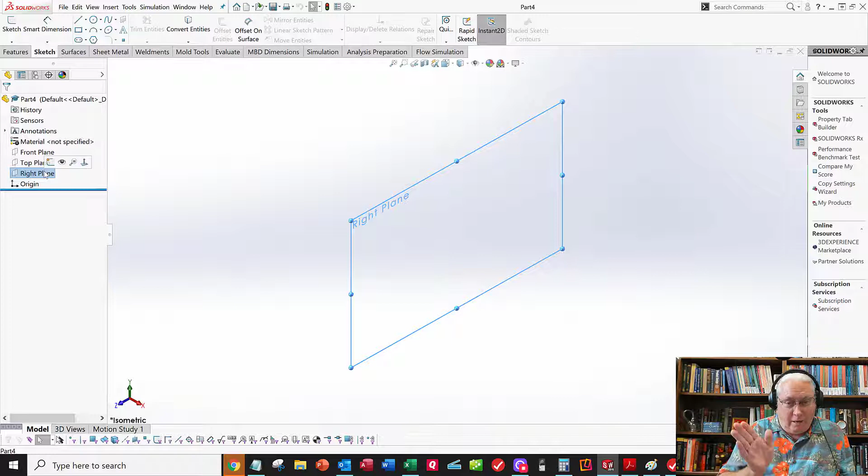We need to find an appropriate plane to sketch on, and I believe it makes sense to sketch on this right plane, just like we did on the V-block, so that these parts will share that same right plane going right through the middle of the whole assembly. So we'll sketch on the right plane, sketch tab, hit the sketch button.

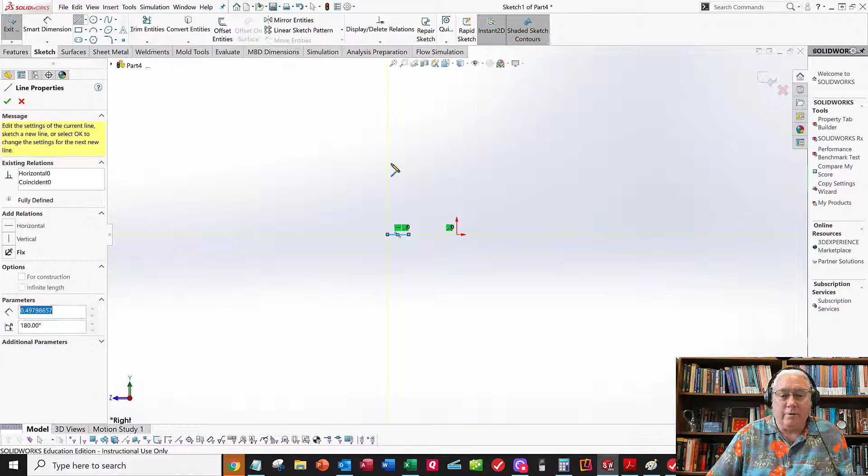Alright, let's draw this thing up here. We're going to make the bottom of our part the top plane, so I can start drawing this. I'm not going to put these fillets on here because I want to put those fillets in as features.

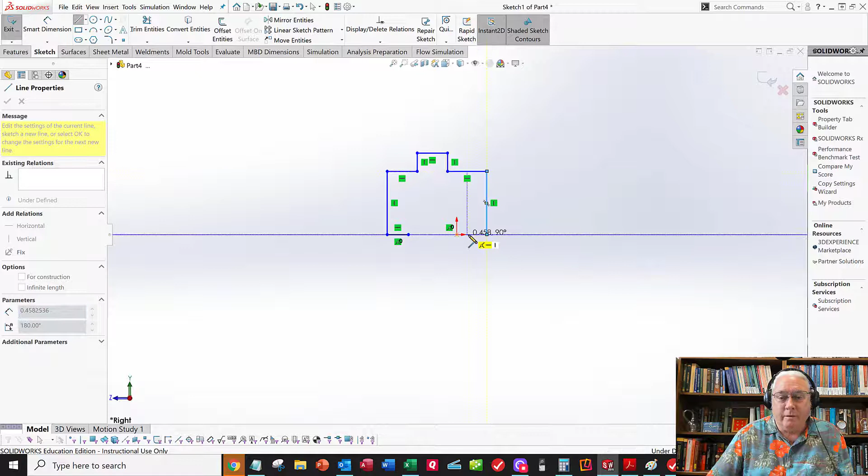So I'm going to draw this, trying to make all these lines vertical and horizontal, so I don't have to come back later and fix them. Seems to be going relatively well. And if I close it out, which I didn't, I should get my shaded shape there.

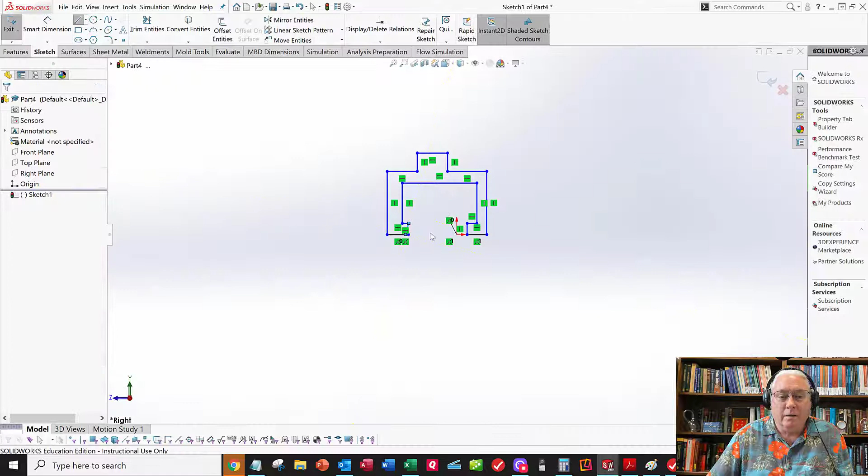So I must have mucked up that last click there, zoomed out too far. I can fix that by selecting that point, control clicking that point, and merging those together. Now it's a closed loop.

Need to make that vertical. So it's close, but no cigar. Everything else looks like it's behaving relatively well. Let's go ahead and drag this thing over so it's closer to the middle where the origin is.

Maybe I can put a midpoint on this top line here, because this is the center of my part. There's the midpoint. And control click the origin, make those line up vertically. Alright, now we're on our way.

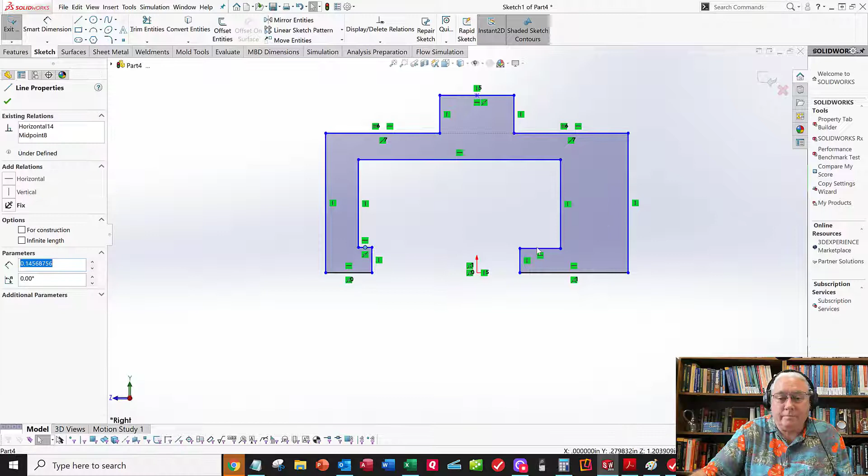So let's go ahead and do some constraints here, like we like to do. These need to be equal and collinear, so I can do those at the same time. These need to be equal. Didn't want that point right there, I wanted this line. Control click that line, make those equal.

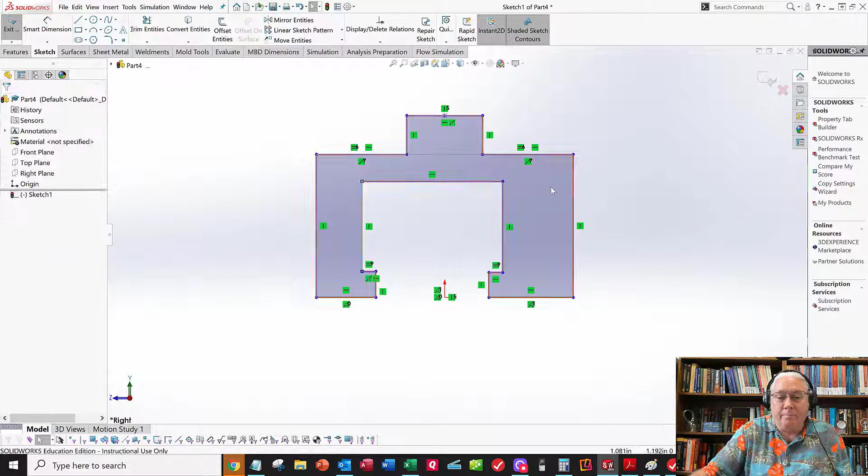Alright, that looks weird, let's drag him back. Drag him over. Alright, now maybe I need to make these equal. Do as many geometric constraints as I can. Now it looks pretty well behaved.

Alright, so I'm going to change these dimensions a little bit. I don't like these off-kilter numbers. This is supposed to be a 0.97 radius here, but I want to make it a 1-inch radius. So change that 0.97 to a 1-inch radius, and we'll put that on as a feature later.

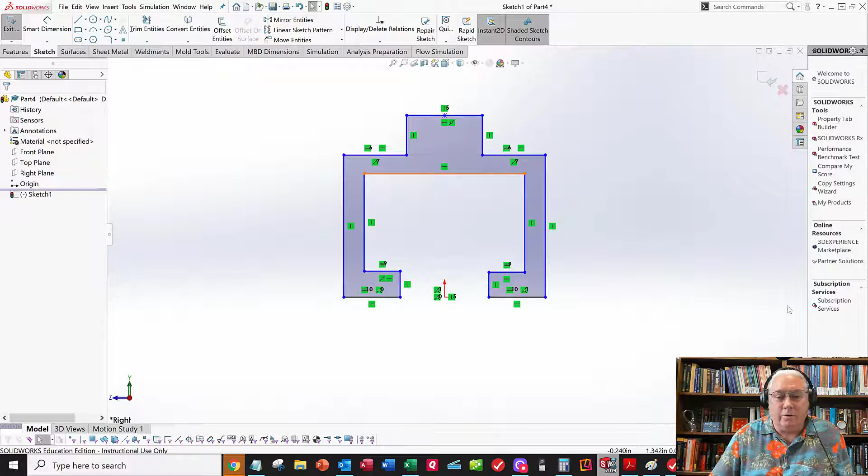What I want to do is maintain this part thickness. The structural engineer told the design team that he wants these thicknesses of this U-clamp to be 7/32 of an inch, all these thicknesses here, 7/32. So I want to put that as design intent into my part model by going Tools, Equations, and make a global variable called little t, equal to 7 divided by 32, which will help me with these dimensions.

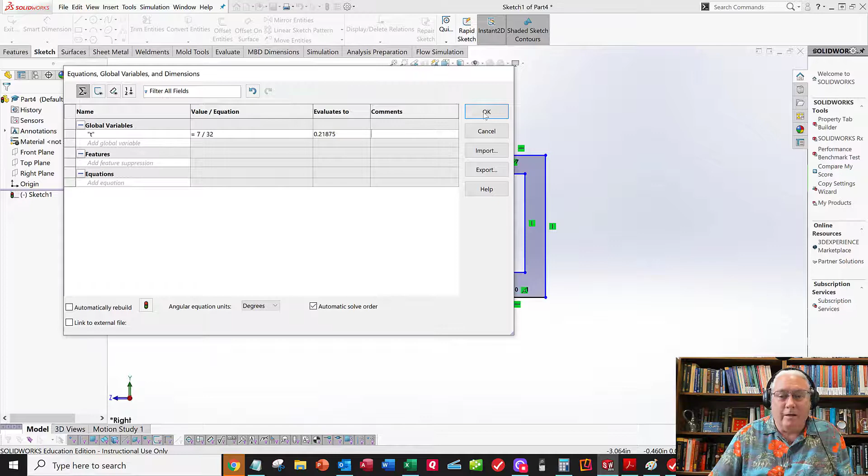So now I want to start placing those dimensions here to here. That's one of them. Here to here is another one. Here to here is another one. And here to here is the last one. Oh, doesn't need that one because of the symmetry, so that's good.

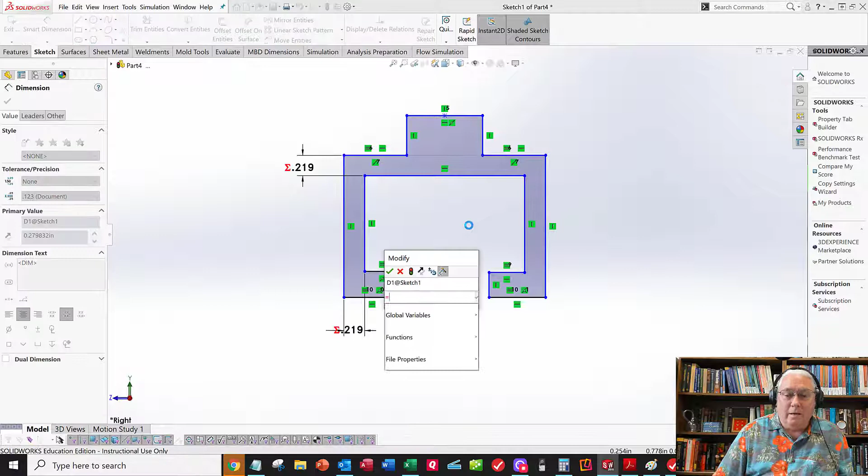So I want to double click on this guy fast and say equals global variable t. This guy here is going to be the same thing - double click fast, equal global variable t. There should be one more around here somewhere - equal global variable t. And I get all those symbols on there with the summation, the red summation, so I know I did those right.

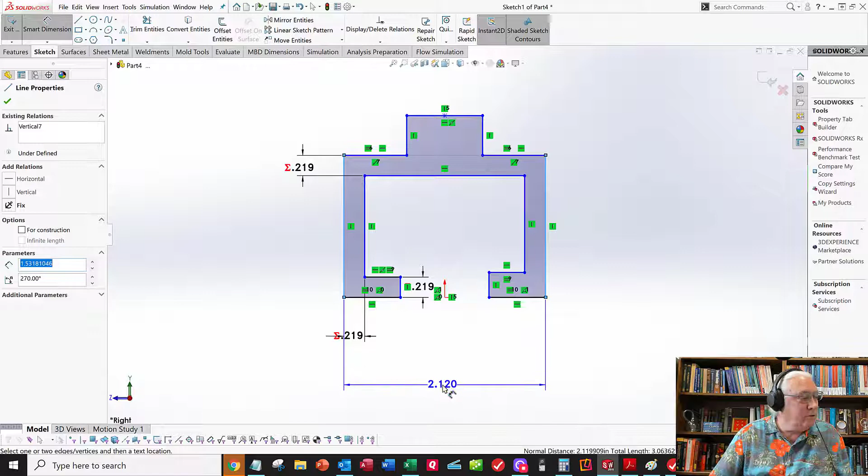Alright, so if this is 1-inch fillet, and these are 7/32 here, this is going to be 2 inches wide, and this overall width here is then going to be 2 7/16 - so 2 plus 7 divided by 16. That's my 2.44, it's really 2.4375. Now everything will line up good. That, minus another one of those over here, gives me my 2 inches, which means those two fillets are going to be correct. Now we'll keep going on my dimensions.

I want this width here to be 5/8 of an inch, and I want to type that in parametric, as design intent, it's supposed to be 5/8 - it's actually 625. Now what do I need to do? Let's see, I need to go to overall height. And the overall height, looking at this layout here, it looks like 2.75.

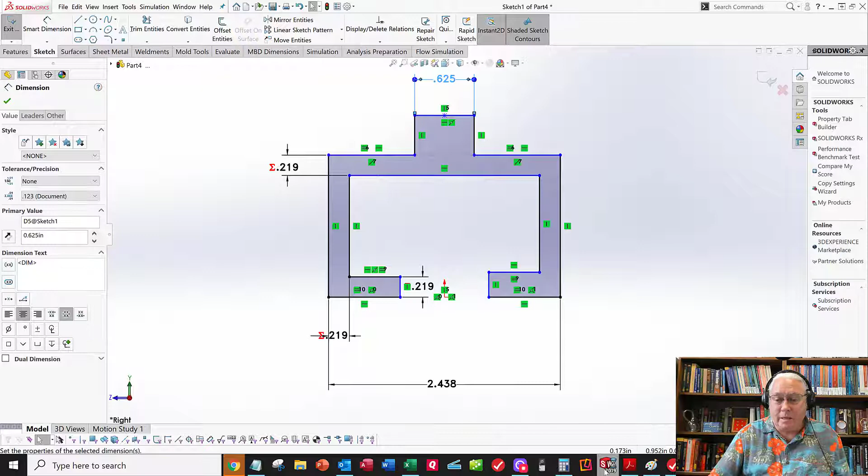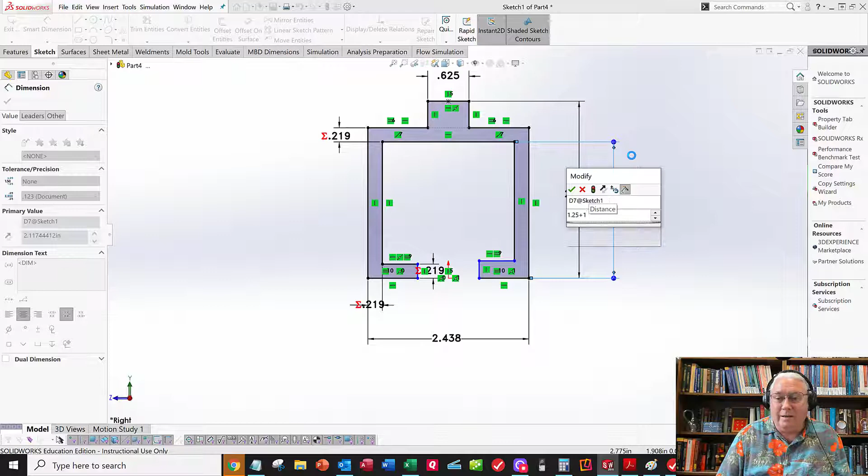And what else do I need? This is obviously a little bit higher. So this fillet right here, how tall is that right there? Well, here we go. So if the distance from the bottom to the center of that fillet is 1 1/4 inches, and if this fillet is 1 inch, then now I know this dimension from here to here. That is going to be what? It's going to be 1.25 to the center of the radius plus 1. So that's 2 1/4. Alright, so now these other features are all laid in.

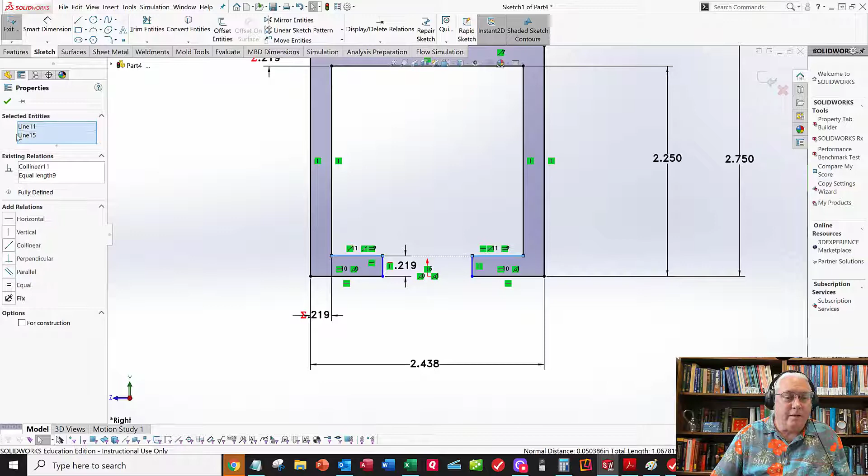Clean this up a little bit. Underdefined, what's underdefined? Oh, I got something wrong down here. Oops. I did make these equal. So let's make this one, or I can make these collinear. Let's make them collinear. So you just find something blue and drag it around until it quits moving, and then you know you're golden.

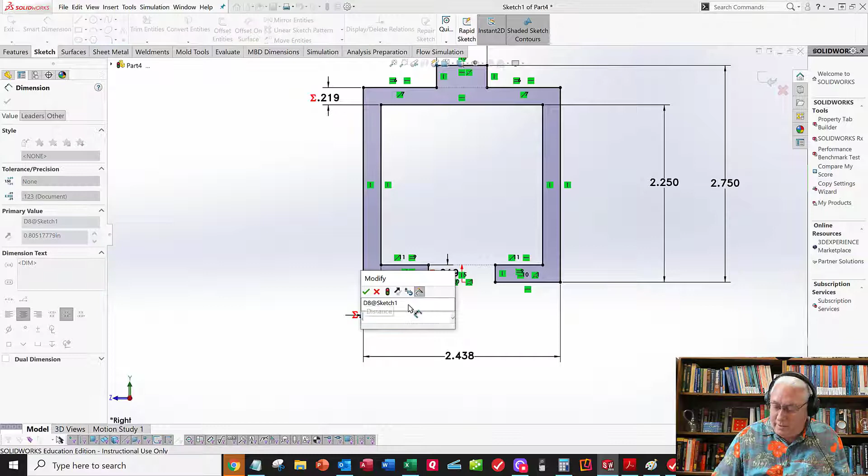This guy here, I need to know, oh, I left off this one dimension here. Well, if this is 2.44, so this is 0.47, so here to here, that's 0.47. And the other one snaps in the same way because I've got some geometric constraints. Now I'm looking good, fully defined. So that looks good. I'll get out of here.

Spacebar, ISO view, select the sketch, pre-select the sketch, go to features, extrude boss base. I want to do the same thing I did on my V block. I want that plane to be in the middle of the part because I'm looking 3 moves ahead when we do our assembly model. I think it's going to be important to have that plane in the middle. And so the total thickness is 5/8 of an inch.

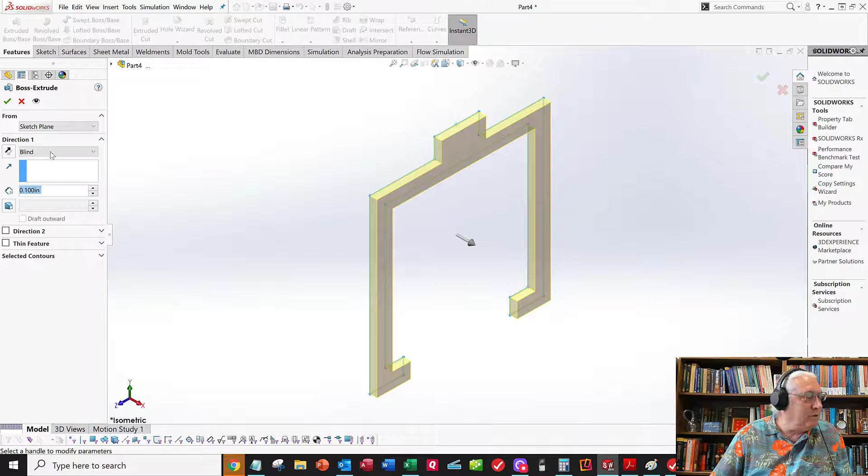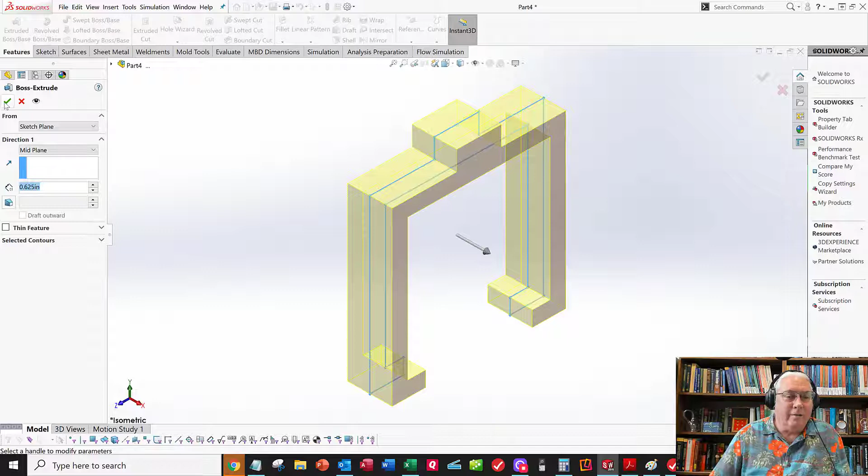So I'm going to type in, as soon as this thing comes back to life here, make this blind 5/8, and I want to do a mid plane so that that plane stays in the middle. And now I think I'm good. Alright, that doesn't look too bad. Now let's put those fillets in there.

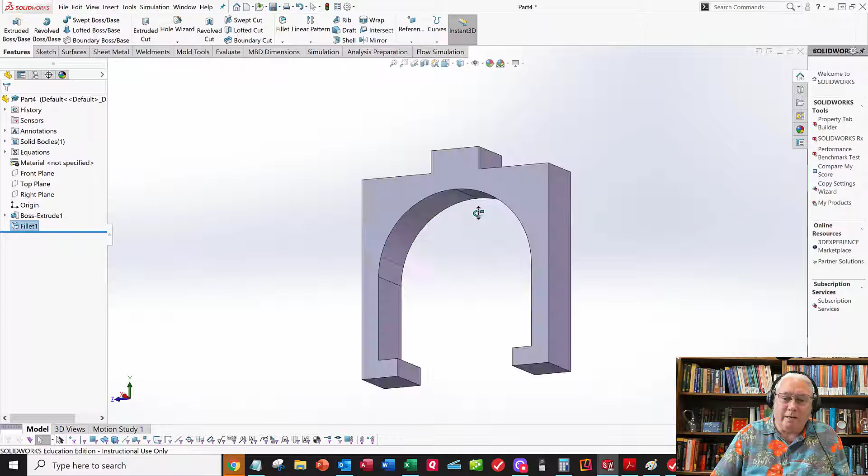I want to say fillet. And I already said these were 1-inch fillets, so here's one, and here's one, and if I type in 1 inch, and say OK, now that thing comes up right there at the top, and it's tangent right there at the top. That looks good. I need another fillet on this other corner, and I've got to think about this.

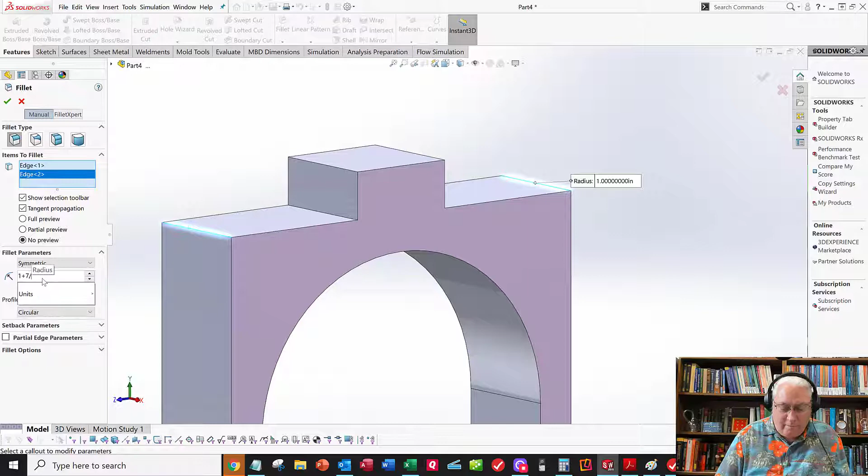If this is 1, and this is 7/32, then I want that fillet to be 1 plus 7/32. So this will be slightly different from what's on the sketch I gave you. But if I select that edge and that edge, both edges are in the box. This is going to be 1 plus 7 divided by 32. 1.21875. Now that's beautiful. This thing is the same thickness all the way around.

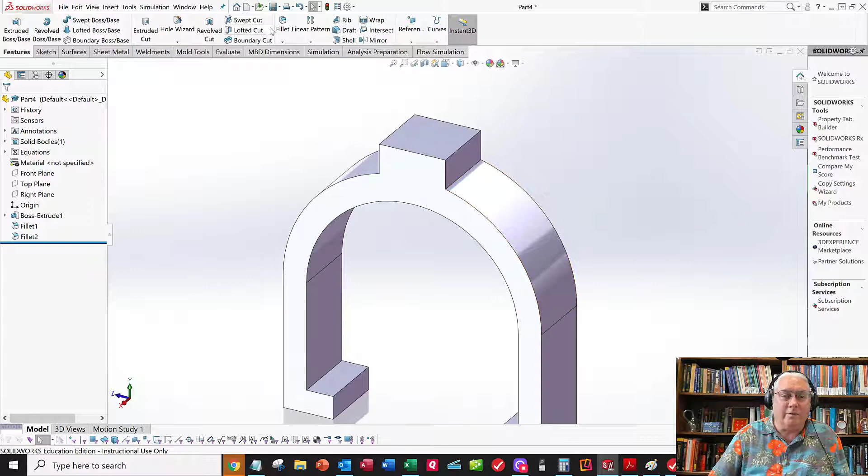And now I'm ready to, got to add a fillet up here. There's an 1/8 inch fillet here. So let's go fillet, and let's go this edge and this edge and make that 0.125. Now it's looking good. Don't forget to add your material.

And now we can use our hole wizard to do this hole at the top. So we're going to go hole wizard. We're again going to choose a tapped hole, straight tap, ANSI inch, tapped hole. In this case, it's a 5/32, excuse me, 5/16, 0.3125, 18. So there it is right there. And then this one's going all the way through.

And through all, I've got that. I want thread call out, I want the thread class, which is 2B, and that's all good. I don't want these countersinks. All right, that's answered all those questions. Now I want to go positions. What face do I want it on? I want it on this face. And look, since I put that plane right in the middle, the origin is right in the middle. So now I can locate that hole right there.

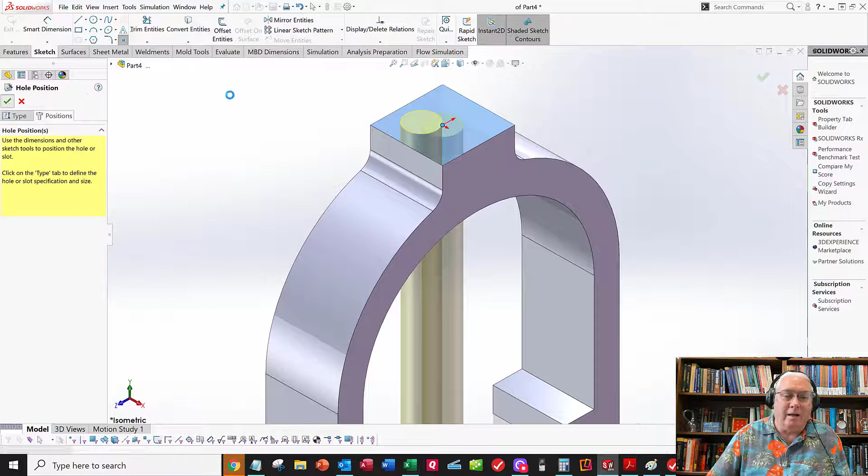And I got it. And again, I need to go to my eyeball here and turn on these annotations so I get my display of my tapped hole that goes all the way through. So it's not really cutting the threads, but it gives you an indication it's a tapped hole, and that's all I really care about.

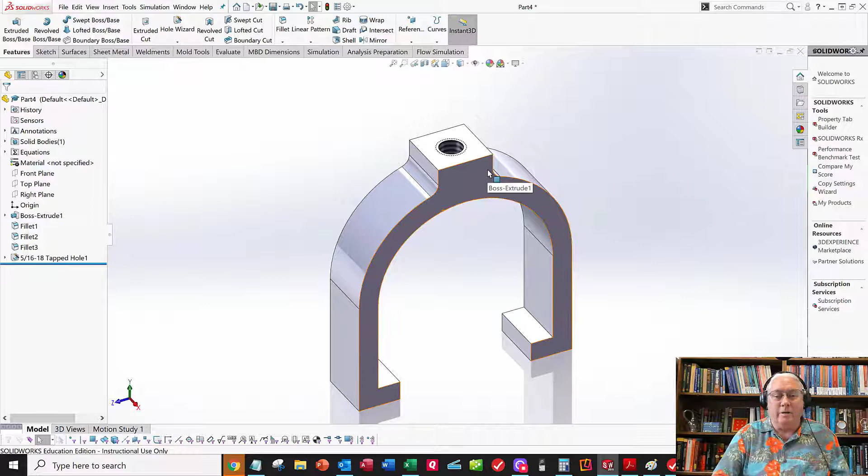All right, so give it the right file name, add your material, and now if you get through with these things during class, you can make the third part, which is a little fastener, and then tomorrow we'll put the assembly together.